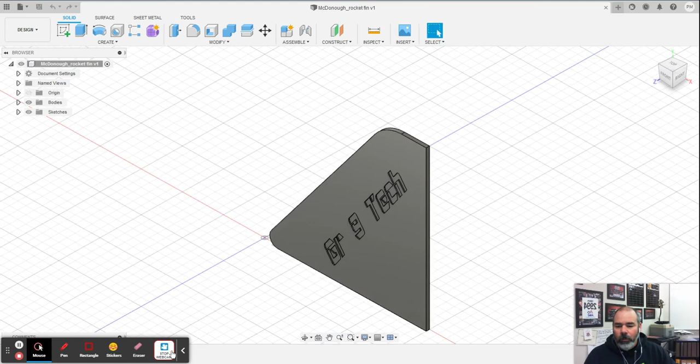Okay, so you can see my fin, I already have it drawn here. I'm going to start a new design.

So I'm in the drawing environment for Fusion. I'm going to change my settings just in case it's in inches. Mine is, so I'm going to click here and change this to millimeters because we want to work in metric, and then I'm going to click OK. So now I'm working in millimeters, and you can see that over here.

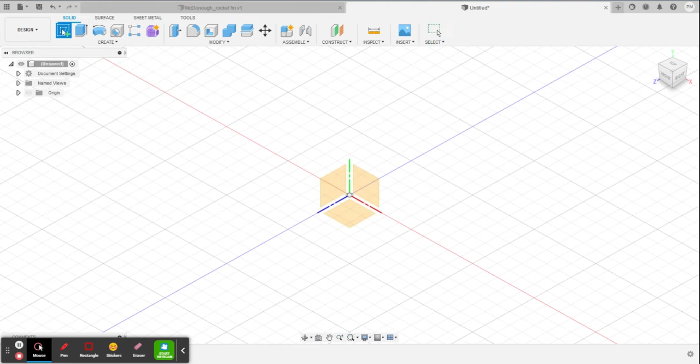The surface I want to draw on, just like before, for my fins is going to be the X and Y surface with the Z coming out towards you. So to start drawing on the X and Y, you click Sketch, and you can pick X and Y because you can see the green and red lines here, or you can go up to the origin and pick X, Y there. Either way works. I'm just going to click on the surface I want to draw on, and that's this one.

I know my fin is 75 millimeters across the base, and it's 100 millimeters tall. So I'm going to use the line command, and I'm going to draw a line out this direction. I don't have to be exact because I'm going to dimension it. If you want to try and get it close, go ahead, but I'm not going to, so I'm just going to drop a single line there.

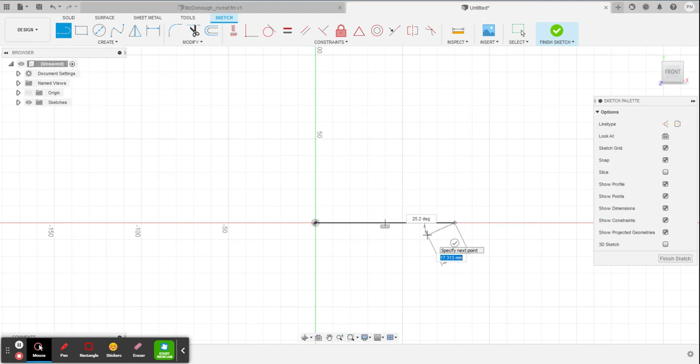Then I'm going to hit Escape on my keyboard to get out of the command, and I'm going to go back to the line command, and go up this way, and drop a line there, then hit Escape again to get out of the command. Then I'm going to give both of these lines a dimension.

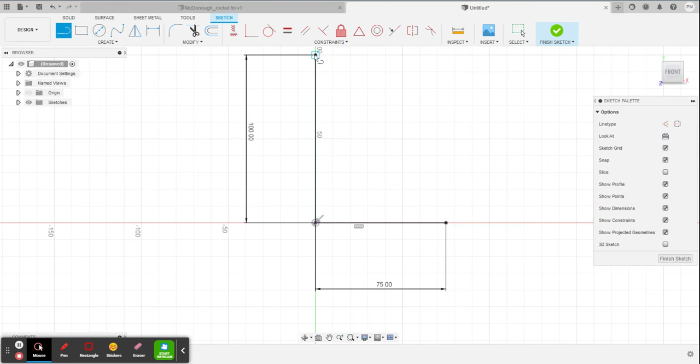So this way is going to be 100, and this way is going to be 75. I type it in, then I hit Escape to get out of the command again. Then I'm going to draw a third line from the end of this one down to this one here. So there you go, that's the shape of my fin, and I'm going to hit Escape.

Now, I don't really like the idea of these being really pointy, so I want to round my fins so that they're a little bit nicer. So I'm going to use the Fillet command, right here. I'm going to click on Fillet, and then you notice my icon changes, and I'm going to click on the two lines that I want to fillet, or round over.

Now you can see that it's giving me a preview of what it's going to look like. Right now, the radius of that fillet is 20 millimeters. I'm going to change that to 5, and you can see that it changes up at the top. Now you can go down smaller, you can go down to 2 if you wanted, or I like 5, so I'm going to stick with 5, and I'm going to hit Enter because that's the number I want.

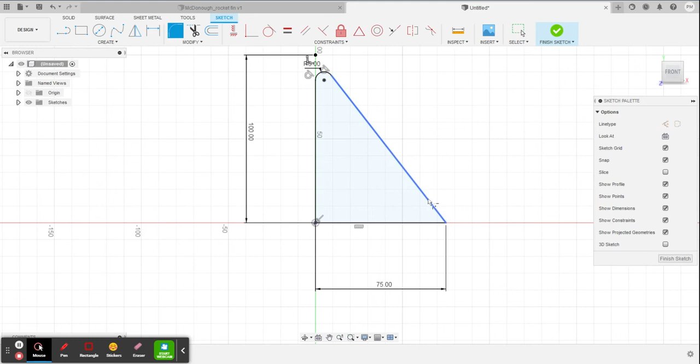Now I want to round this over, but I don't want to do it at 5 millimeters. I want to do this corner at a larger radius. So I'm going to go Fillet again, and I'm going to pick this line, and it's at 20 again.

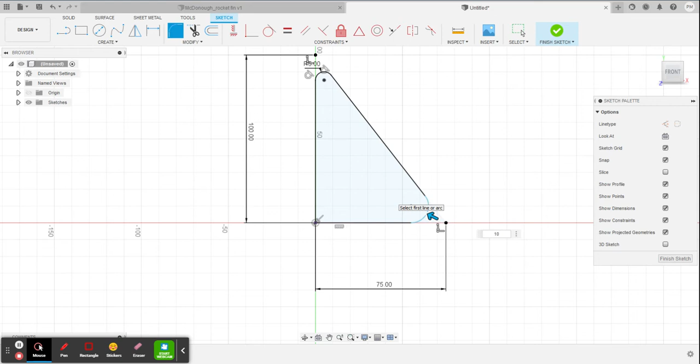20 is a bit too big, so I'm going to change it to 10, and it gives me a preview. I kind of like 10, but what if I was to change that to, say, 7? 7 kind of looks good. Actually, I'm going to go back to 10, I kind of like 10. So I'm going to keep my fillet at 10, and I'm going to hit Enter, and it's going to round it over for me. Okay.

You notice that now my cursor is just normal. I've done drawing what I want to draw, so I'm going to finish my sketch, and it's going to go back into a 3D view like this.

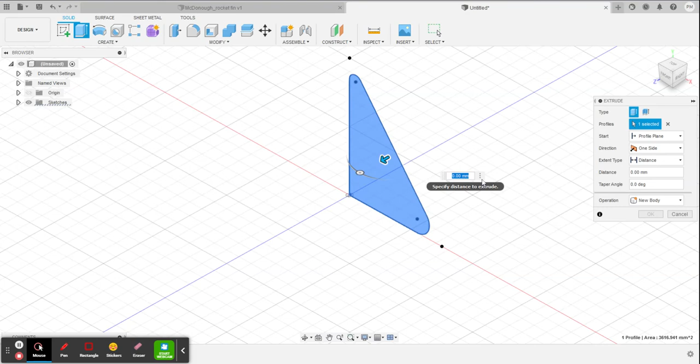I'm going to then extrude the shape I just drew, and I'm going to make my fin 2 millimeters thick. I think 2 millimeters is a good thickness. You don't want to make it any thinner. You could maybe go to 1.5, but that's pretty flimsy. I like 2 millimeters, so we're going to stick with 2 millimeters.

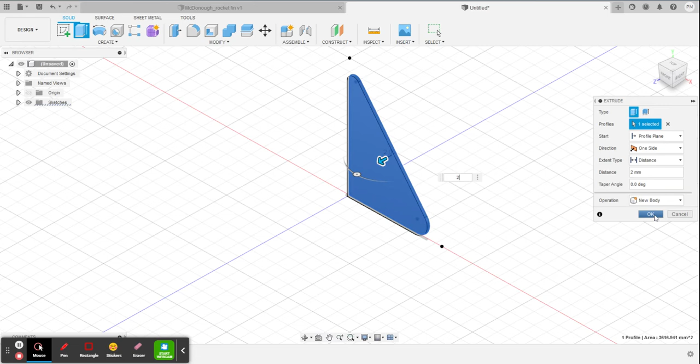You could make it a little bit thicker, 2.5, but it takes longer to 3D print if you're going to 3D print them. So I'm going to go to 2. 2 millimeters is good, and that's what I want. So there we go, now I have my fin.

Once I've drawn my fin, one of the next things I'm going to do is right away, I'm going to save my work. So I'm going to go to the little floppy disk icon, and as always, it's your last name underscore rocket fin.

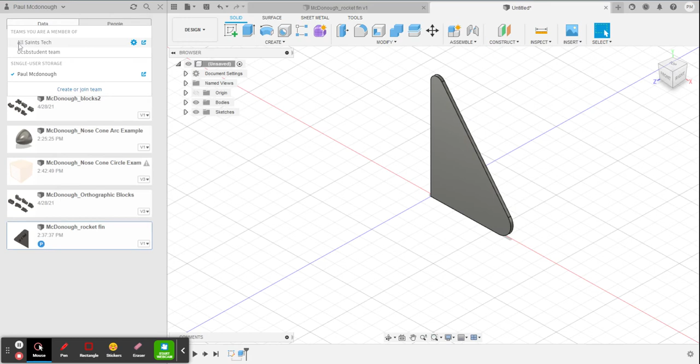Right now I'm in my grade 9 tech examples, but you don't want to save it there. You want to save yours under our grade 9 tech team. Let me change that real quick and make sure I'm in the All Saints tech team, in grade 9, the class folder for this class, grade 9 spring, and then into Bottle Rocket. Okay, so I'm where I need to be.

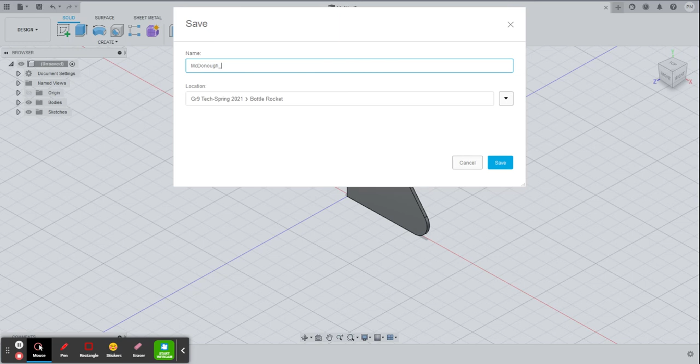Now I'm going to click on the floppy disk. Again, it's last name underscore fin, or rocket fin. Let's call it rocket fin. Okay, and I'm in the right folder, Bottle Rocket, perfect. I'm going to click save. You'll notice the file name changes up here.

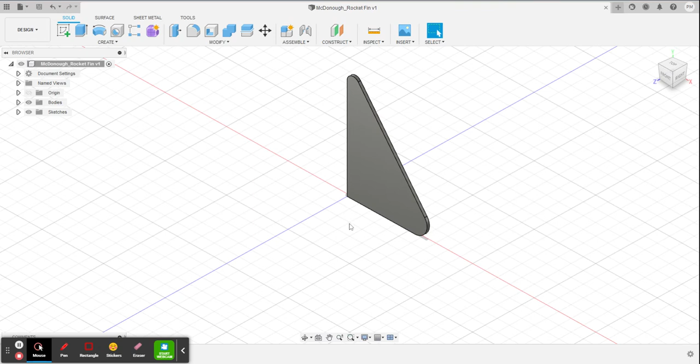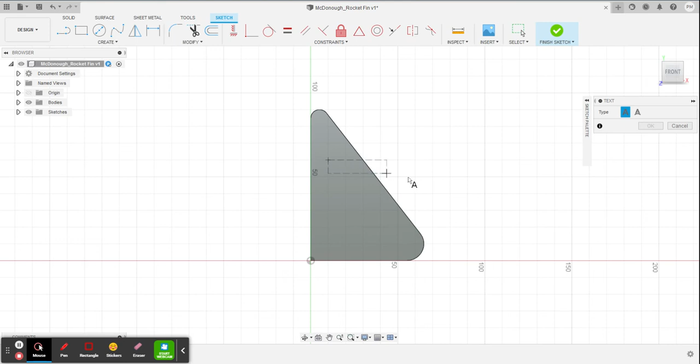Say I wanted to put some embossed text on here. I'm going to go back to Sketch and pick the surface of the fin. Then under Create, if I click the down arrow, you'll see a text command. I'm going to click text, and I'm going to expand this. It's asking me to draw the box that I want to put my text in, so I'll draw a horizontal box and rotate it afterwards. There we go, and see the example text.

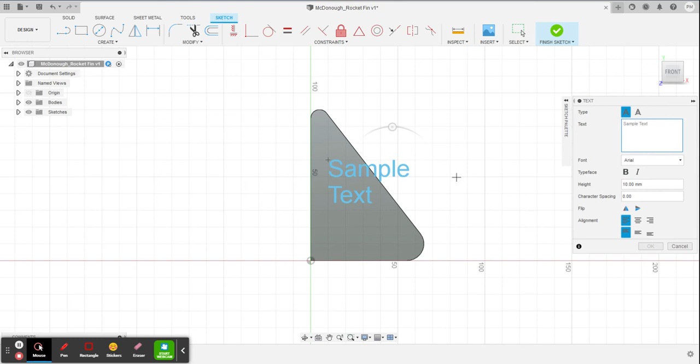I'm going to change that text. Sorry, I have to type the text first. I'm going to type GR9 Tech - I'll just use grade 9 Tech. You can change the height of the text if you want. I'm going to do... no, I'll keep it at 10. I like 10, 10's better, 10 millimeter text. So you can change the height there, and you can change the style of text. Once you're done, you click OK.

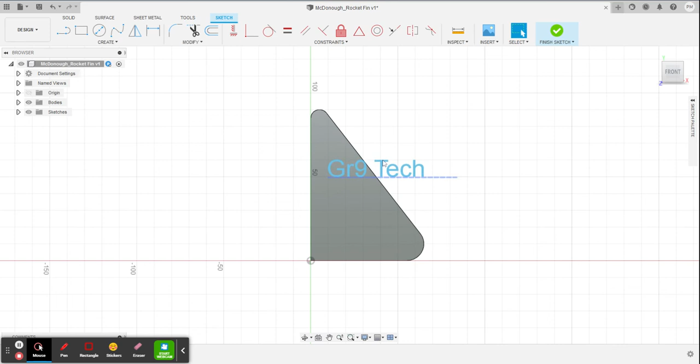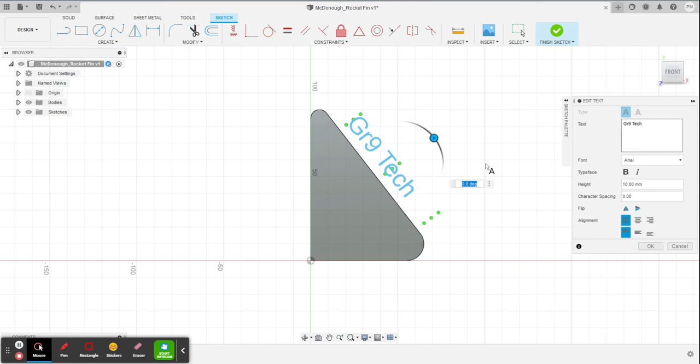You'll notice it's not on the fin, so I have to rotate this. If I double click on that box again and grab this handle up here, I should be able to rotate it to match the angle of the fin. Okay, and say I wanted to move it this way, I can grab... oh, sorry, let go of the text there. Then I can grab here and move it in. There we go, so you got to expand the bottom first and then move the top over. Something like that, but you can play around with it to get it where you want.

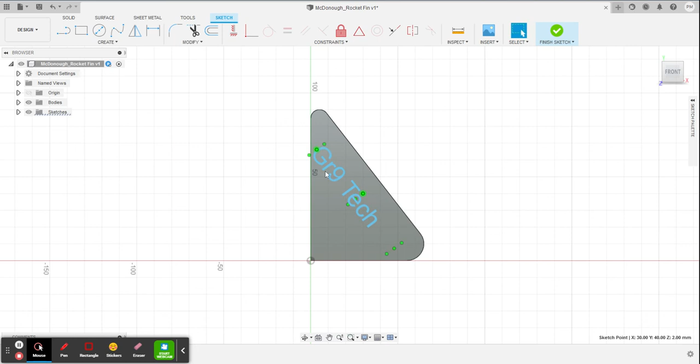And I want to move it - oops. Grab it by the top part and move it down this way a little. There we go. So once I have the text, I finish my sketch.

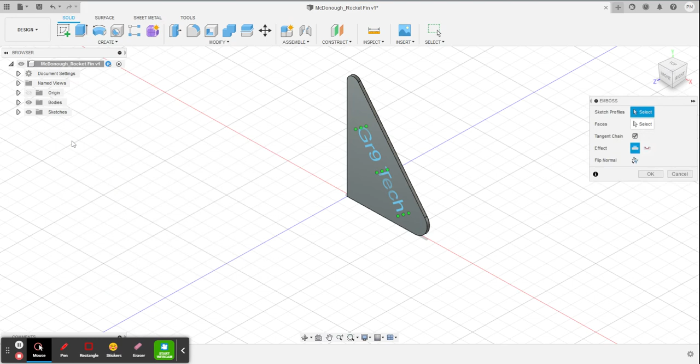Under Create, now that I've finished my text, my ribbon's back to its normal state. I click the down arrow and come down to the one that says Emboss. I click Emboss, then I click on the text I want to emboss, and I want to do a negative emboss. It should select - oh sorry, I've got to select the face. I want to emboss it on that face there. So I selected the text and then the face.

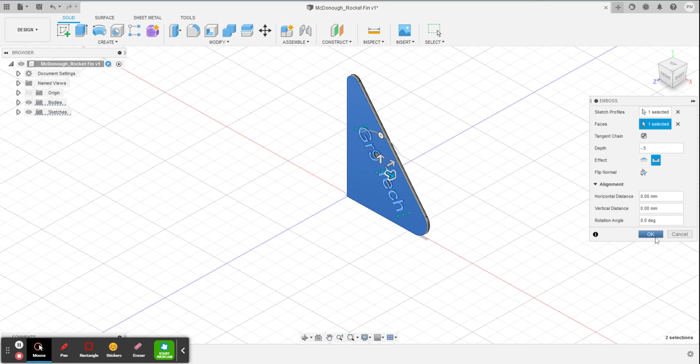I don't want to go full 2 millimeters, I'm going to go 0.5 of a millimeter, but negative 0.5, so it goes in. Okay, and then I click OK. And there we have it - we have an embossed fin.

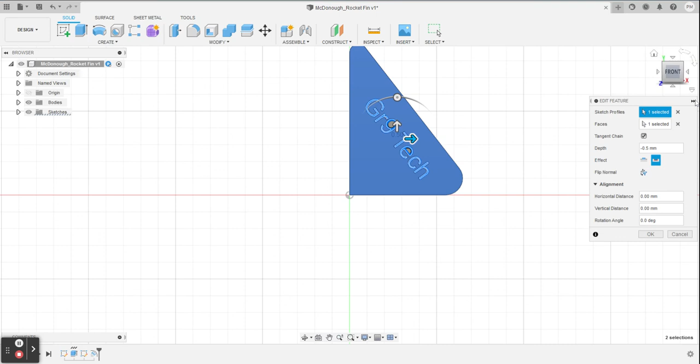Now if you want to change it, you can double click on it, or go down to the timeline and double click on the emboss down here. If you want to make changes, you can also click on the text, which is down here as well. So I'm going to click OK.

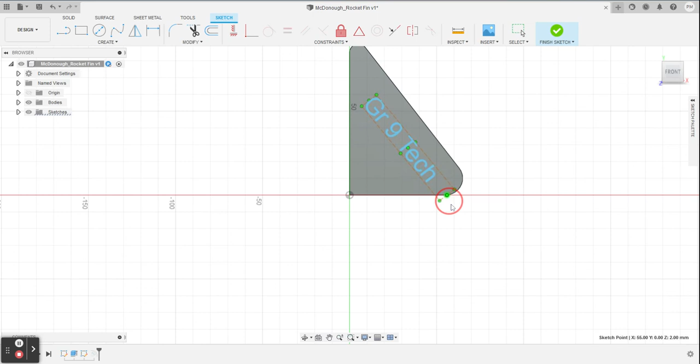Say I wanted to edit the text, I can go down here, right click, and go to edit sketch. That'll let me edit the text - you can see it here. I forgot to put a space in between. I'll go back - nope, I made it too long, so we stretch it out a little. There we go. Then finish sketch, and it'll update the sketch.

So there you have it - that is essentially drawing your fins and putting some embossed text on it. You don't have to put embossed text on your fins, you can just leave it plain. It's your choice - no extra marks for doing embossed text or not.